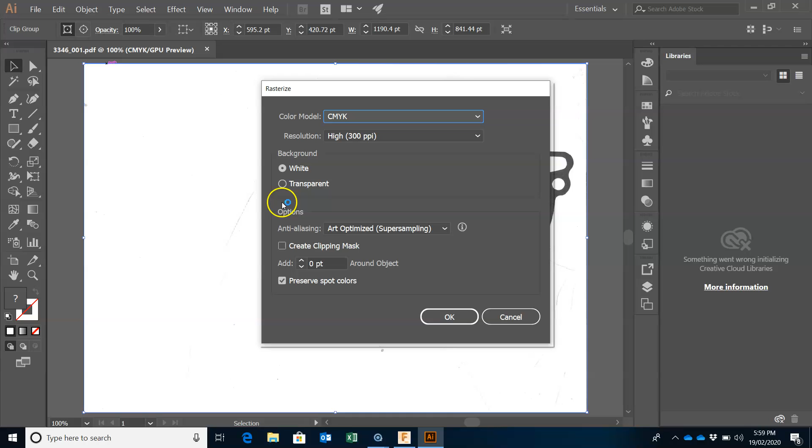Okay, now first you need to left click on the actual scanned image, go to Object, go to Rasterize. What that does is converts the PDF into a picture, an artwork. Right, now it's rasterized. What we need to do now is go to Object, then click on Image Trace and choose Make and Expand. Click on OK.

What we now need to do is click and just drag it over a little bit to just ensure that we have vectorized the picture. Now go to Object and click Ungroup. Now click off the square here and click on the actual gasket itself, and then press Ctrl X to cut.

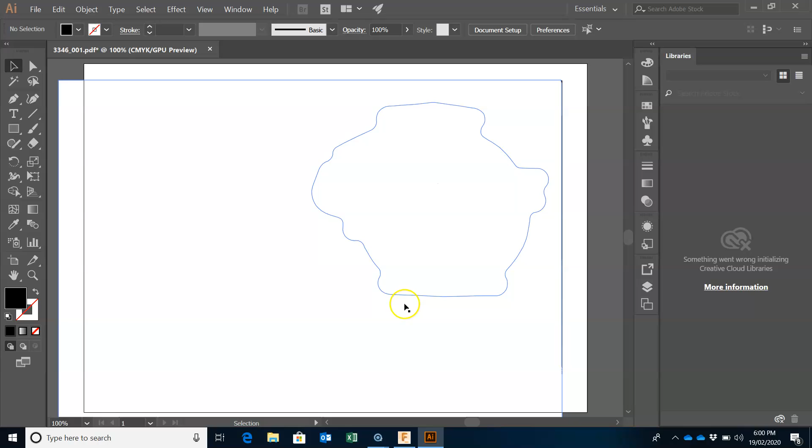And this is a cleanup step that'll help you get rid of all these duplicate layers and so forth. Press Ctrl A to select all the other messy objects left behind. Press Delete on the keyboard, and now press Ctrl V to bring back the clean vectorized gasket.

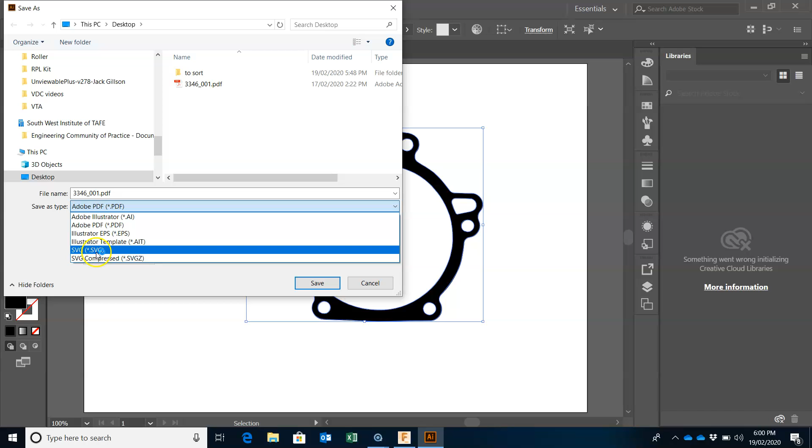Now click on File, Save As, and choose SVG and click Save. I've already got one here, but I'll save over the top of it just to show you. Okay, now you can close Illustrator, clear the clipboard,

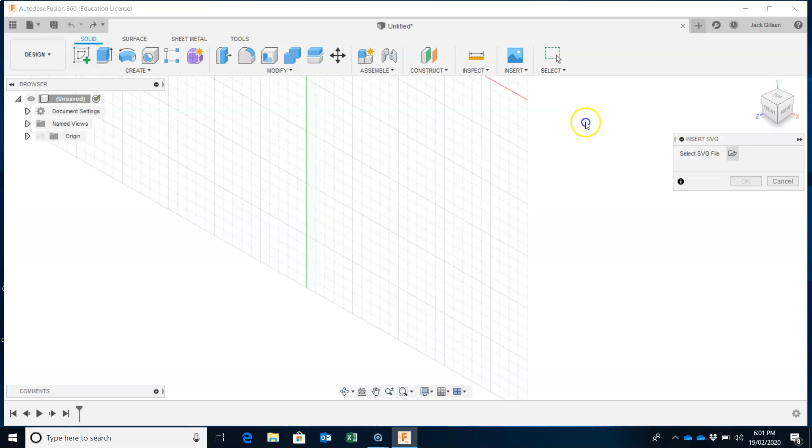open up Fusion 360, and on a fresh new drawing you can go to either File, New, click on Insert and choose Insert SVG. You just need to use this little file picker to find the file, click on the SVG file, click Open.

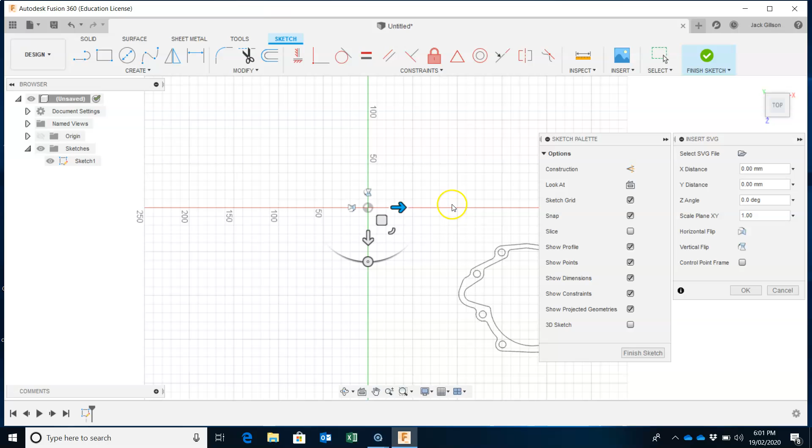First of all, you've got to choose a plane to locate the SVG on. Just click on a plane, and it should be dimensionally accurate at this point in time from the scan to the CAD program. So we can click on OK, and we can click Finish Sketch.

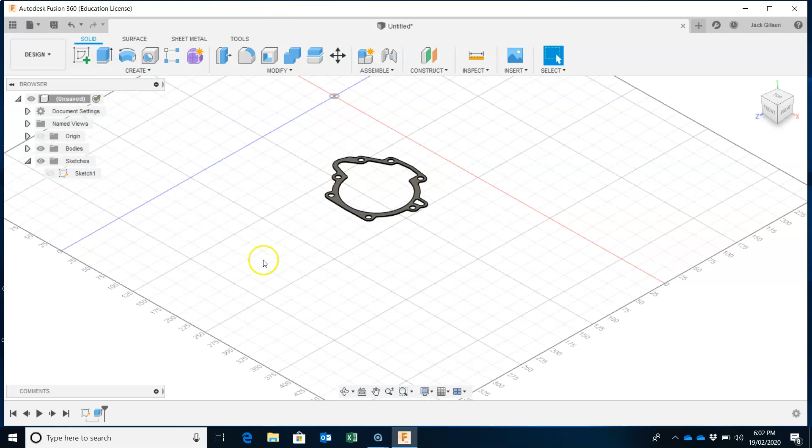What we now can do is extrude the gasket by just choosing it like so and giving it a thickness of anything you like, really. 1 mil will do. Click on OK. So we have a clean 3D CAD file now that we can work with.

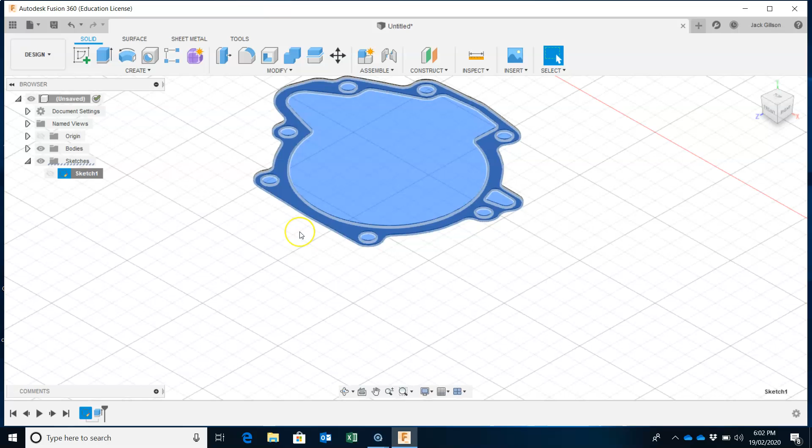If I wanted to output this to a DXF, you right click on the sketch here, Save as DXF. So you could then save, and you could send that DXF file to a laser cutter to get it cut, or you could even do that within this software by post-processing and generating a G-code file for the appropriate machine that you want to cut it on. And that's it.